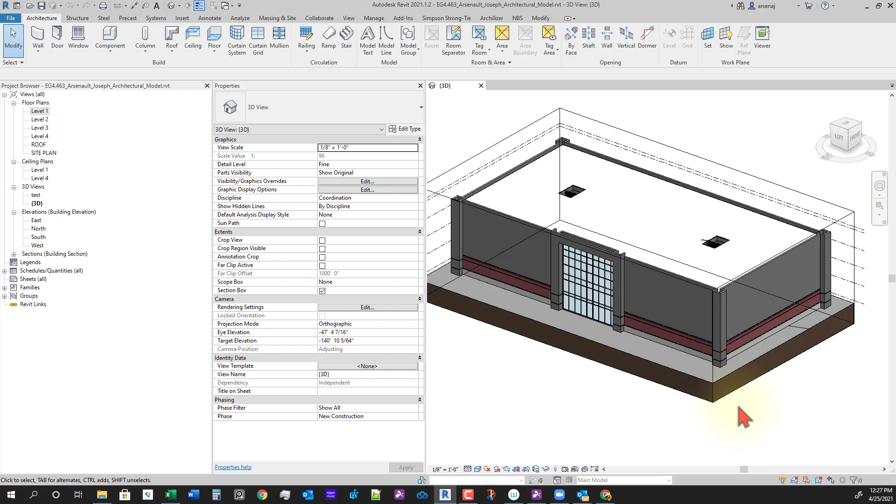In this video, we're going to move our project base point and rotate our project so that it fits better on the sheet.

What I'm talking about is if you go to level one, double click on your project browser. You don't need to do this, but I'm going to demonstrate. I'm going to create a new sheet and load in our sheet. Again, you don't need to do this, it's just an example of why we're doing what we're doing. So we have our sheet here.

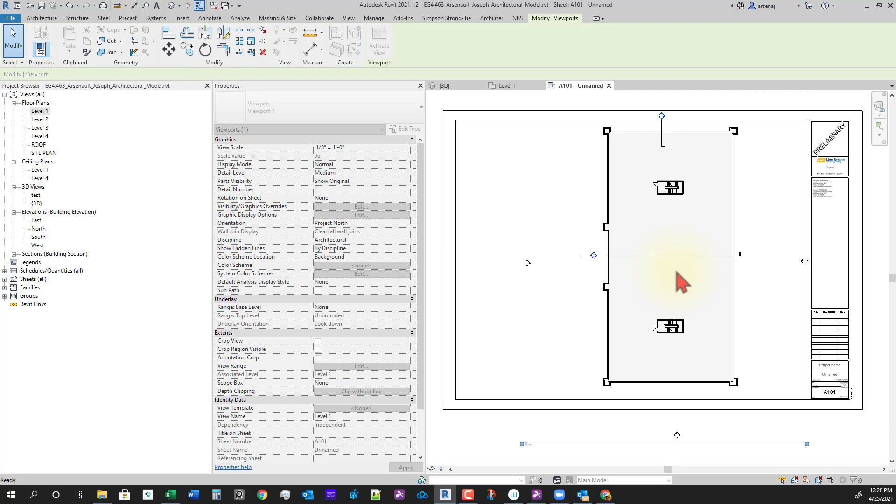If I were to pull this level one plan onto here, it fits okay on that 1/8 inch equals a foot. But as you can see, if we were to make the scale any bigger, like if we wanted our plans to be a 1/4 inch equals a foot,

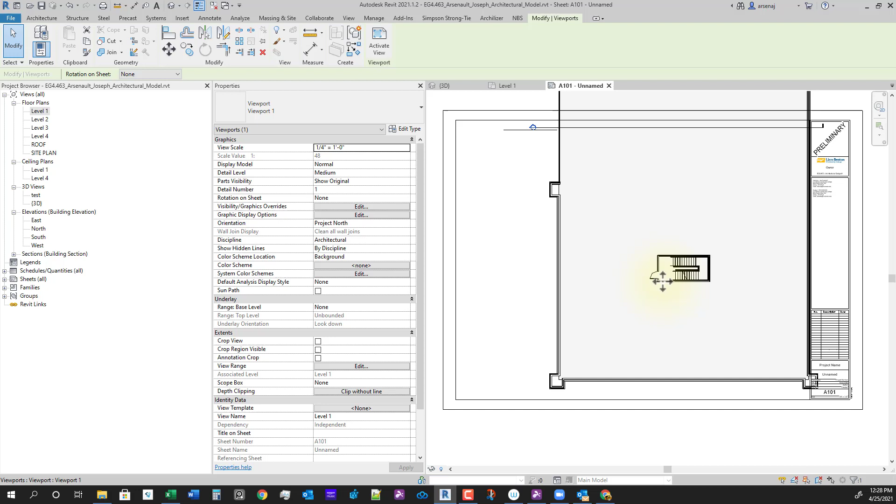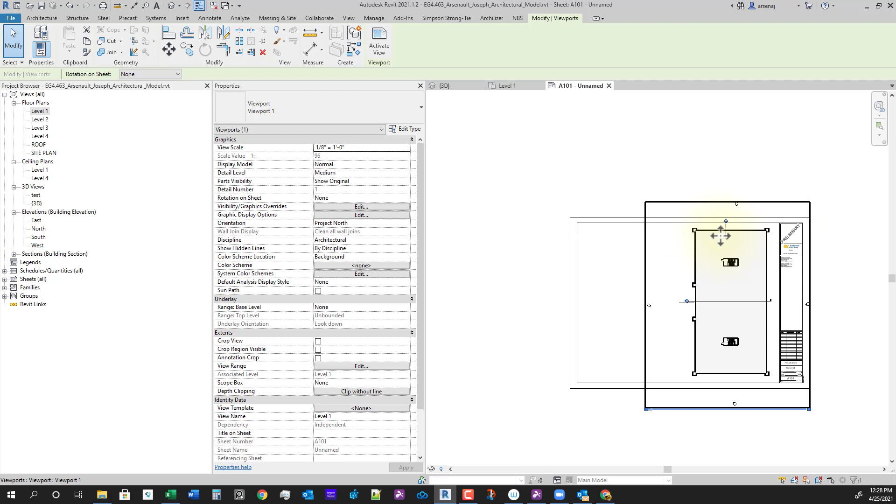it'll be off the sheet. And it would be too if it was rotated. But in some cases, it is better to rotate it so that it would fit better on the sheet. So what we're going to do is rotate our project so that in the future, if you have a project that's going to be too big - and see here, we wouldn't have a ton of room to add dimensions or anything else - what we're going to do is I'm going to just delete this and delete this sheet.

Again, you don't need to have created the sheet unless you wanted to see for yourself. What we're going to do is go up to manage. So this you can do.

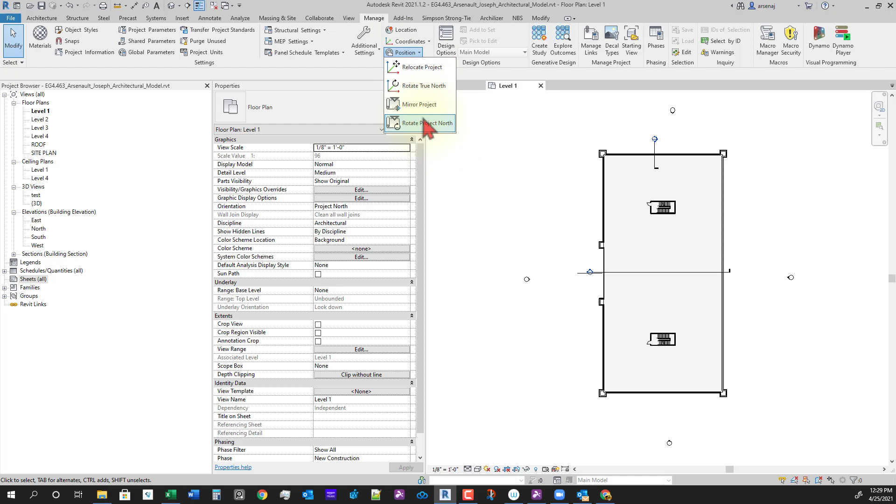And we're going to change the position. We're going to go to our manage tab, then project location, then position. We're going to relocate... sorry, let's see here. We're not going to relocate true north, we're going to relocate project north.

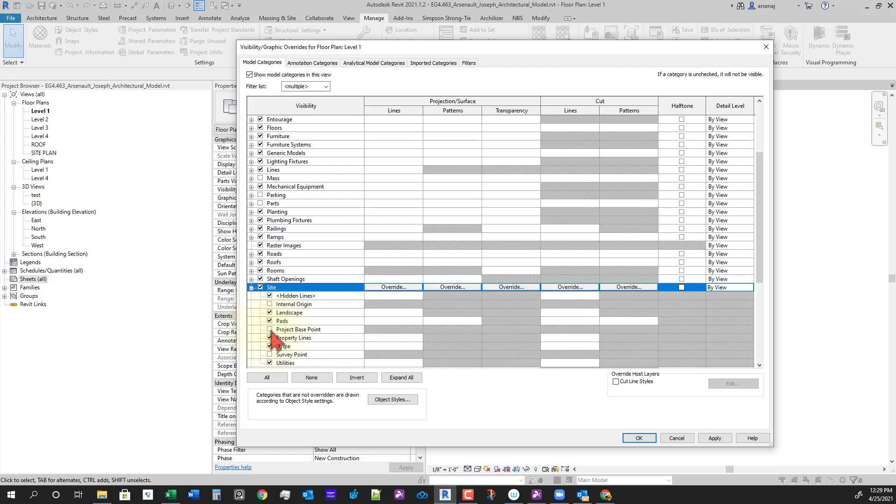Before we do that, let's go to our visibility graphics. On the view tab, or the project properties, we will go down and turn on our site. Go to project base point and survey point and turn those on.

So we can see our project base point. If you select the project base point, it'll show you the true north and where we've set our project base point. If you scroll out, you can see where we've selected our site. We can select the survey point and see where that is located.

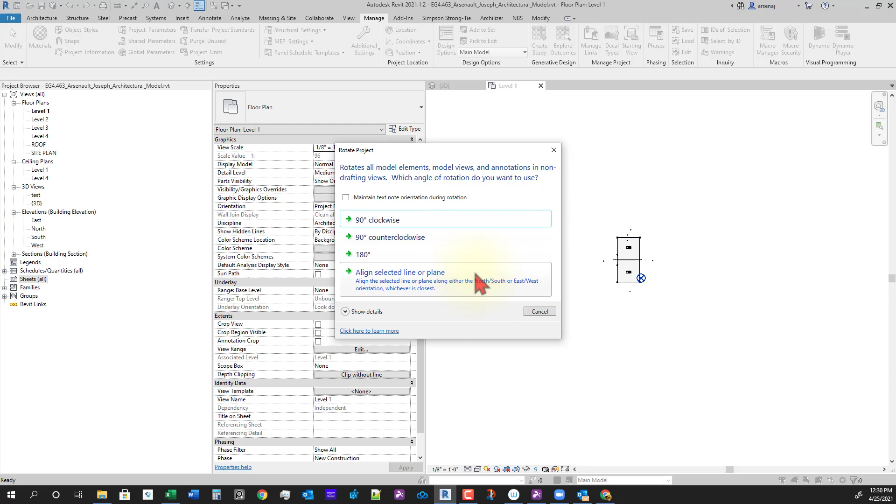So what we'll do is go back to manage, go to position and rotate project north. It'll bring up this window and say rotate all model elements, model views, and annotations in non-drafting views. Before we do this, let's open our 3D view side by side.

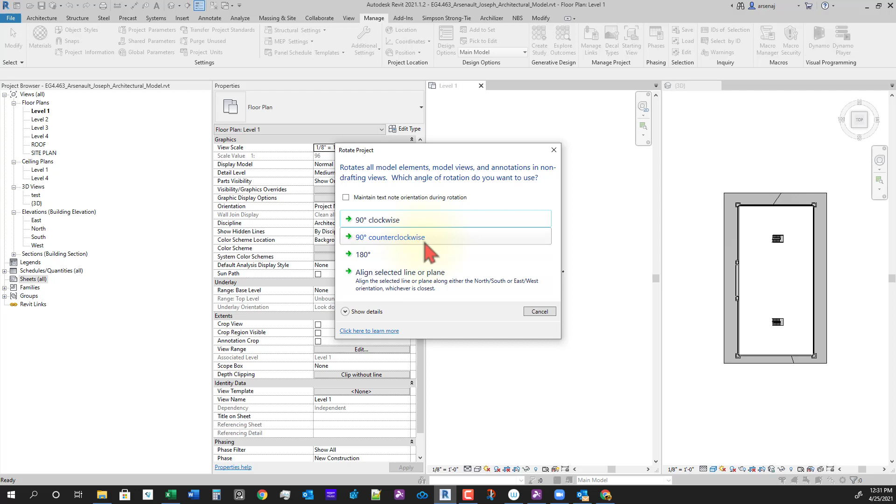You can go to view, tile views, and let's just hit the top view of our 3D view, so we can see what it's actually doing here. Then if we go back to manage, go to position, rotate project north, and let's do counterclockwise 90 degrees, which will put our west elevation where our south elevation is now. So we can go counterclockwise 90 degrees, let it grind.

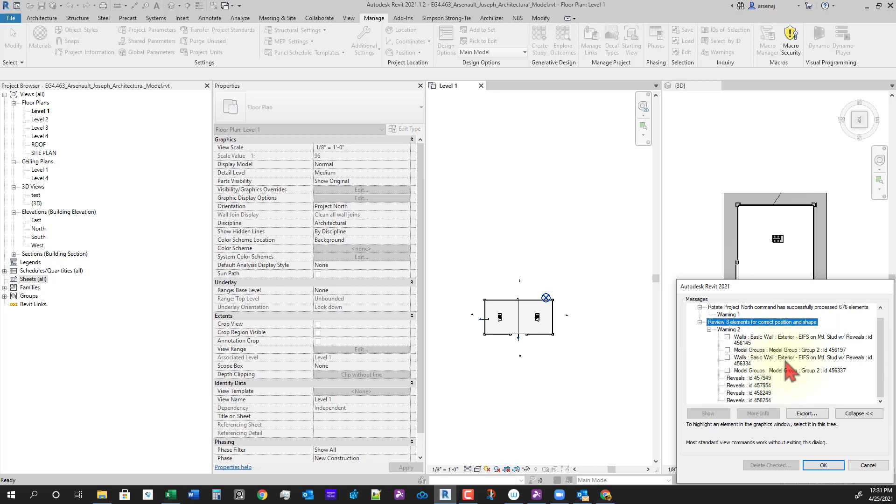Here it says the rotate project north command has successfully processed 676 elements. And here it's just showing some other error - these elements, they corrected the position for these things. You don't have to open this, but this is showing you what it's actually doing.

Here you can see in our plan views, all of our plan views will now be rotated 90 degrees. So even though this was south before, this is actually the west view because our project north has been rotated. And you can see what happened up here with our view cube.

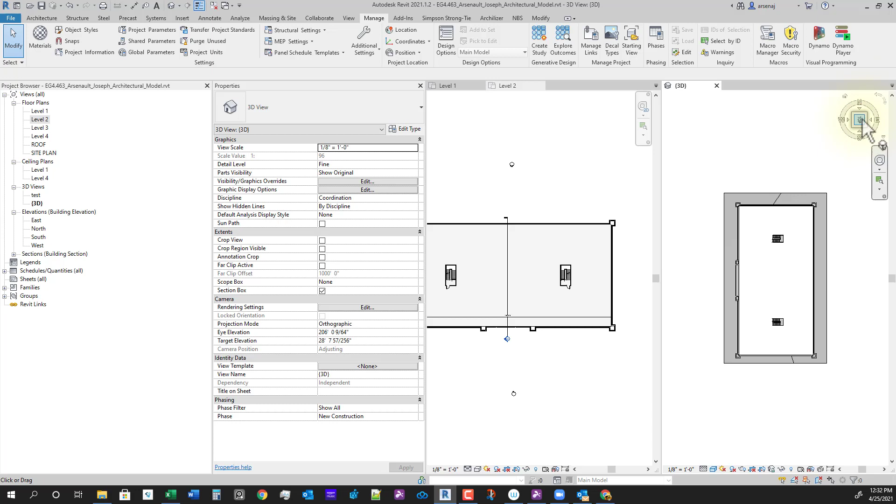The north is still showing this, but you can see how the top is now switched, so that if we were to rotate up here using the view cube arrows, now north is to the left and west is where the south was, and this is our top view, so you can see that we've now rotated our building.

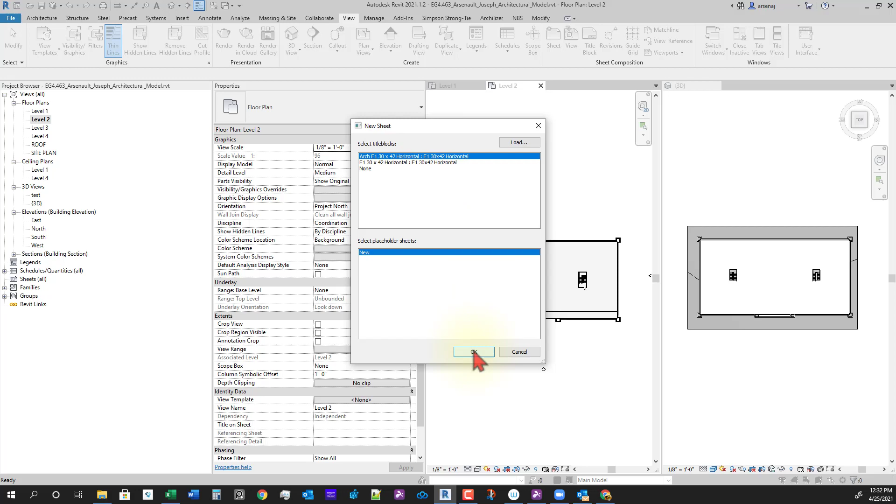So if I were to go back here to view, sheet, and create another sheet, and drag that view onto the sheet, you can see that it's rotated it.

So now in all of our views, it will be rotated 90 degrees, so it'll be easier to place it on the building. The next thing we're going to do is delete that sheet. You don't need to create that.

The next thing I'm going to do is grab the project base point and move it. We've moved it before. Now we can see the angle to true north is actually 90 degrees, and you could actually change that in here, but...

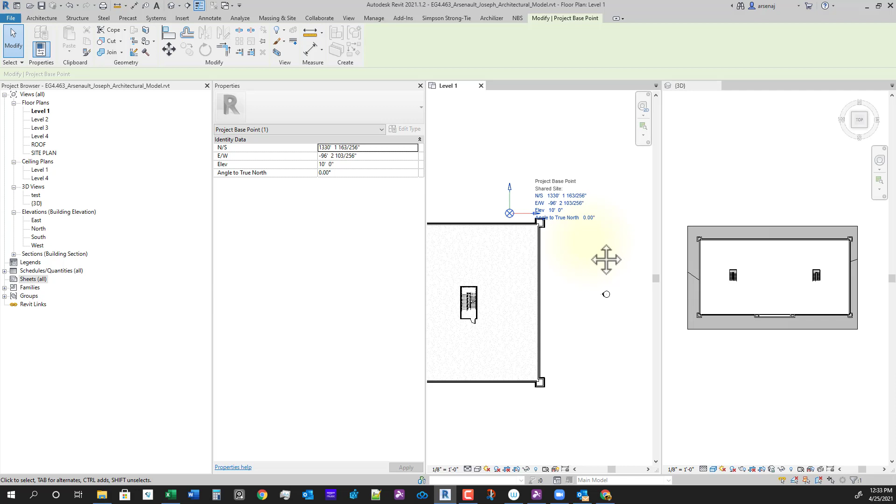Now our building is different, so it's kind of reset where north is on our project, but we don't want to do that. So I'm going to undo that, just showing you here that the project base point is set to be 90 degrees from true north.

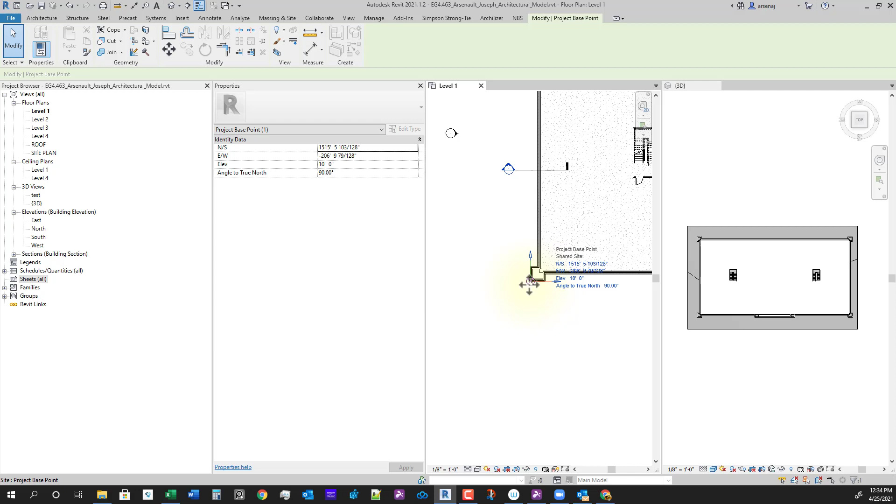And if you just click and hold and drag, we can drag this project base point over here, and you can see it's changing this north-south, east-west coordinates. What I'm going to do is move it pretty close to this corner over here.

Actually, I'm going to put it right here on that corner. But what I want to do is make this kind of a round number. So let's make our project base point north-south coordinate direction an even 1,515 feet even. You can see it moved it.

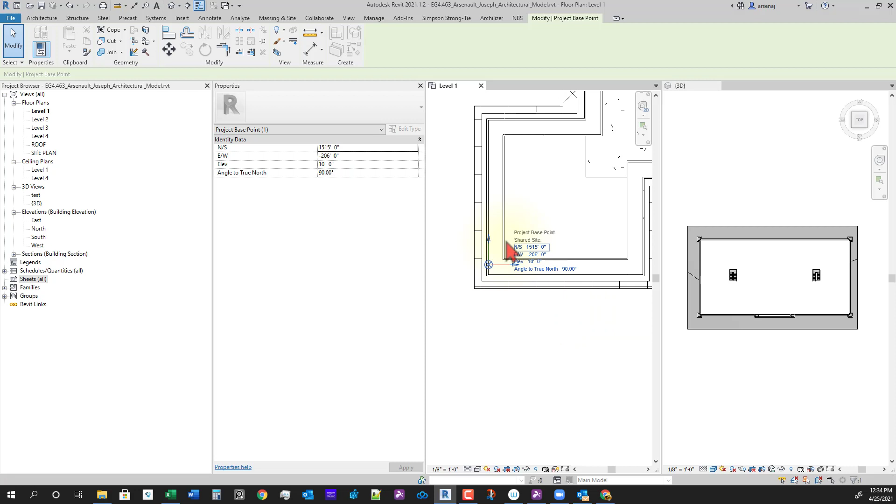And if we were to select this again, it's negative 206. Let's just make that negative, or 206 foot 9 and whatever change. Let's just delete the end and make that negative 206. So that is where I want to set our project base point coordinate location.

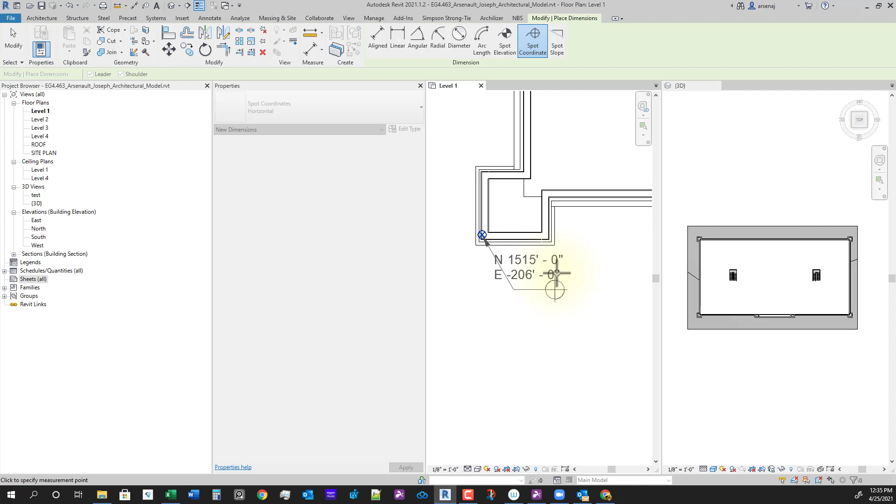So what this will do is, if we go up to annotate and we were to do a spot coordinate, it'll show us where that is located. And then what all the other spot coordinates will be in reference to that project base point.

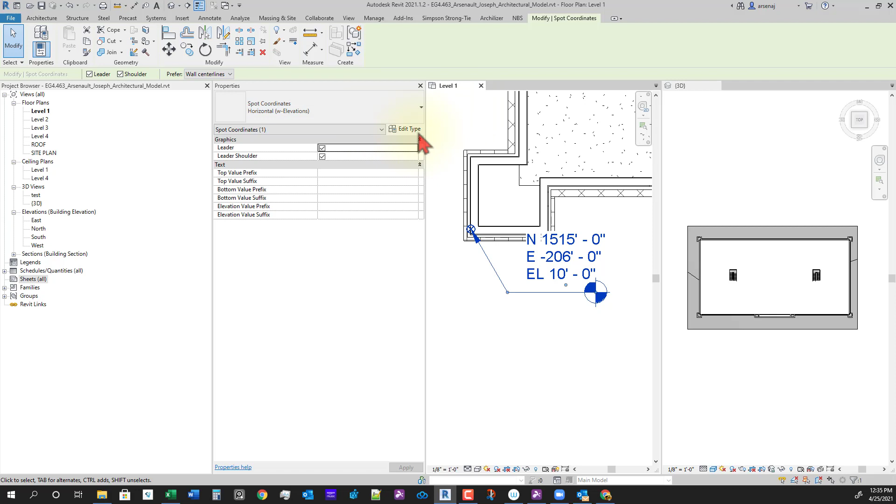So what we'll want to do is, I'm actually going to do this horizontal with elevations. So I went over to the properties and changed that to horizontal elevations. What I want to do is edit this instead of it using, so right now it's using the survey point for this dimension. It's showing us the project base point in reference to where the survey point is.

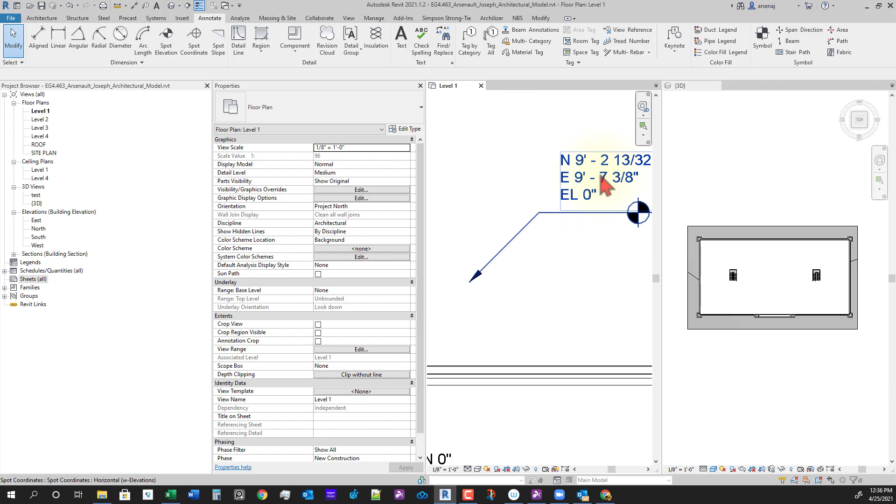So if we go to edit type when that's selected and change from survey point to project base point, and hit OK, now it should say that everything is 0. So if we go back to annotate and do a spot coordinate, let's change that to horizontal with elevations, and we can see it's going to actually give us coordinates. So at this point, from this location is 9 feet and change, and 9 feet 7 inches and some change. So it kind of gives you a reference point.

So if you were to pull any coordinates, all the coordinates that you pull will be from this location. So I'm going to select this project base point, and now we've kind of set it to some nice round numbers, and I'm going to pin it.

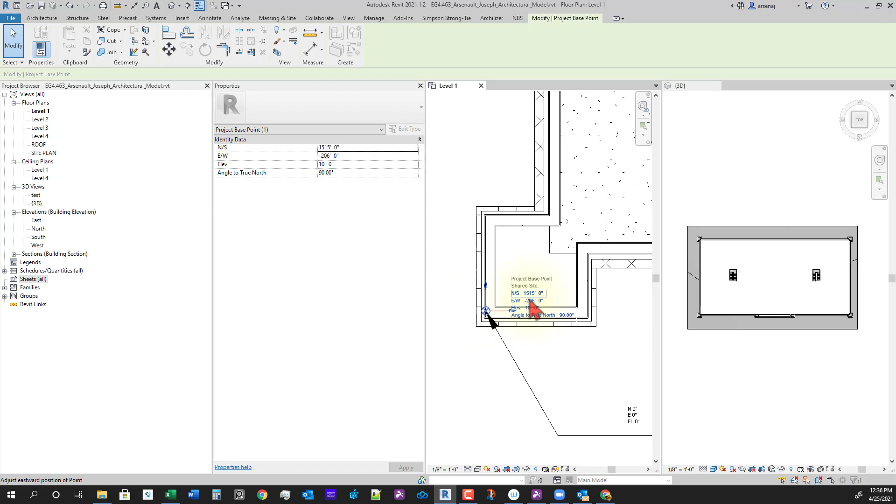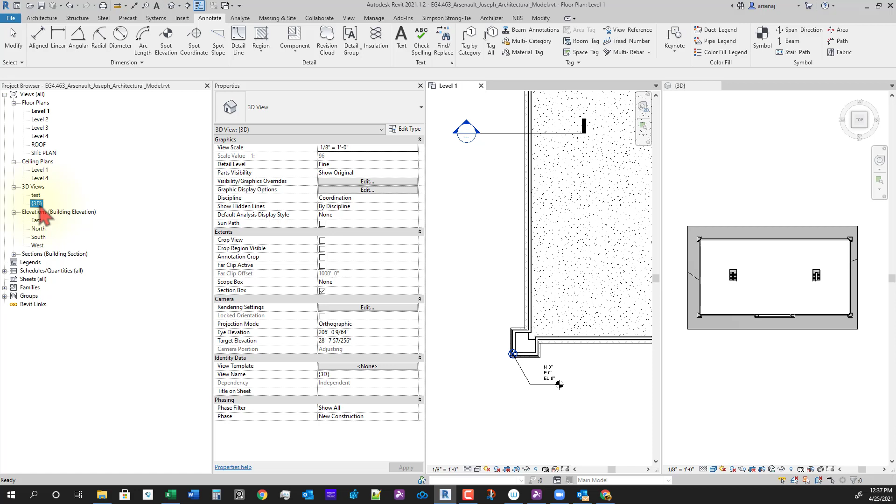And then what I'm going to do next is, I want you to delete this 3D view. The reason is because we're going to recreate a new 3D view so that everything is visible. So if you've turned off anything in this 3D view, if you've hidden the floors or whatever, when we recreate this 3D view, it'll basically recreate it with everything turned on.

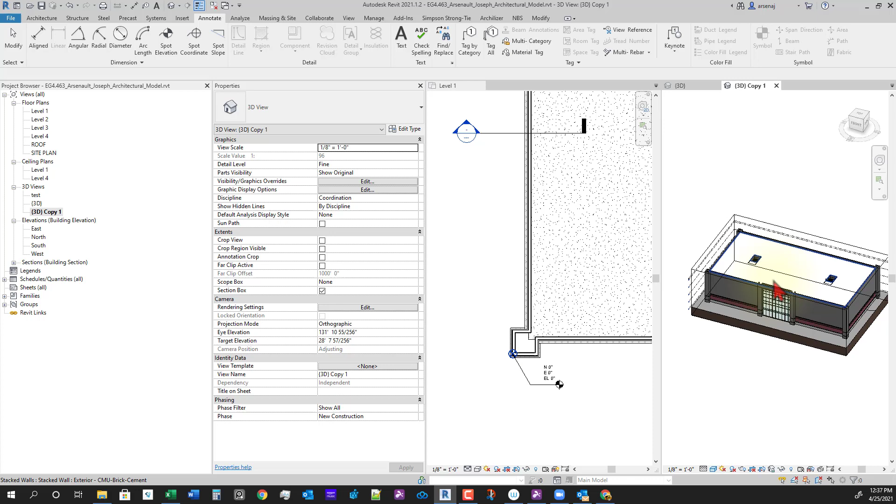If you don't want to delete it, let's say you've done some stuff, you can just right click this 3D view and duplicate, and it'll create another 3D view, and you can leave it as copy one or call it my 3D view or whatever you want to call it. If you want to save it, fine, if you don't care about saving it, then I wouldn't worry about it. And then we can go back to this default 3D view and delete it.

So the next thing we'll do is we'll come up here to the little house, or you can go to the view tab and click on this 3D view.

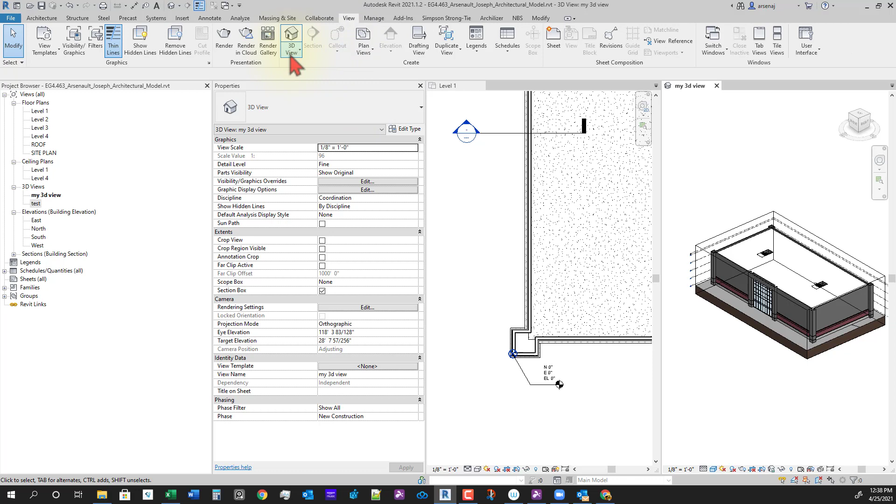It will give you a new 3D view with no section box, and everything should be turned back on. So left click over in the space and window over your entire project. If you hit the filter, you should see all these things selected, the curtain walls we've created, doors, and everything else. That's what we want, everything selected. Now we can go back to your level 1 view and hit move.

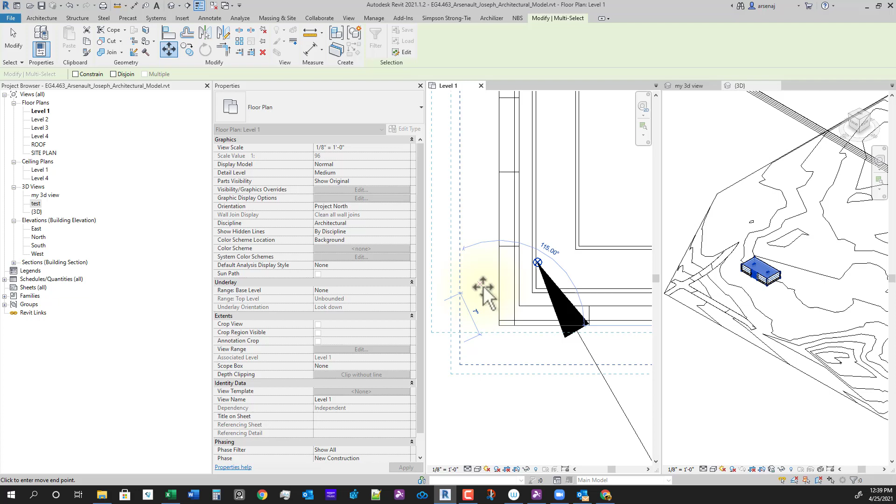I'm going to grab this corner down here, grab this outside corner, let's see if we can get it. Let's just pick this outside corner. This should be the brick, I believe it's the brick. Let's take a quick dimension just to be sure.

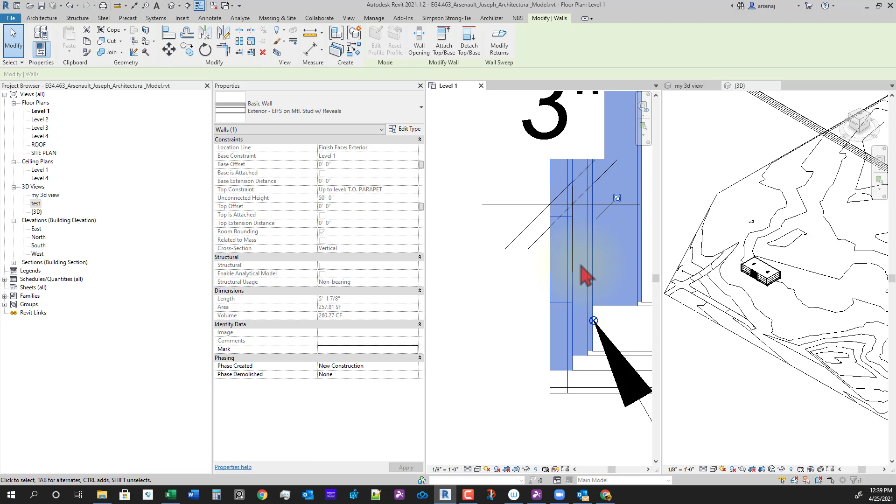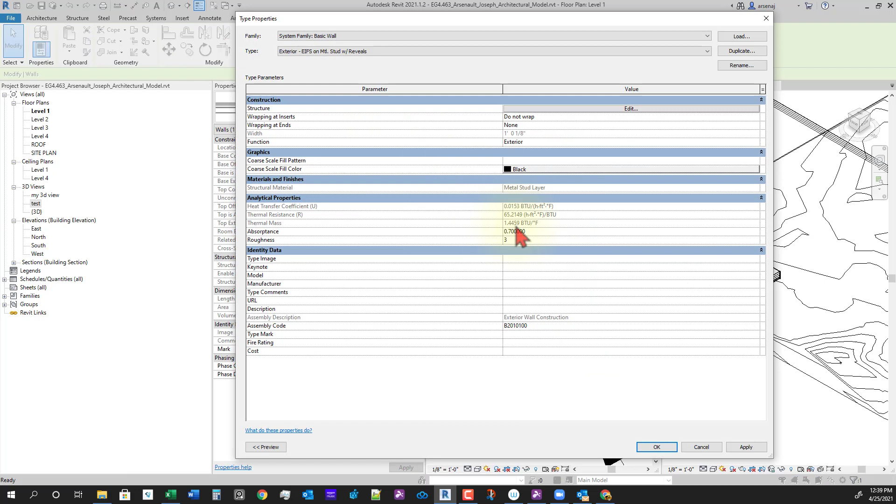Let's see, what is that? That's actually the EIFS layer. So I'm going to go to my view range. Oh yeah, because that's EIFS, I was thinking that we had brick here.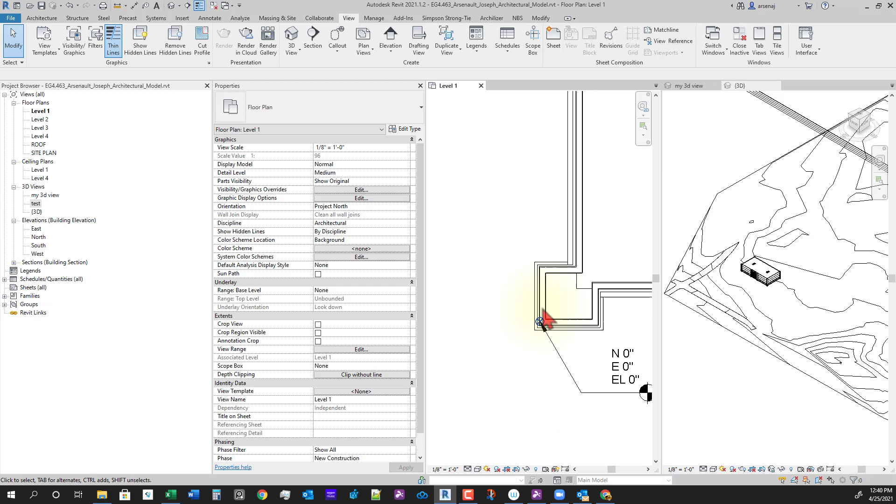So let's right click and select previous. Oh, let's just go back over to our 3D view and select the entire building, hit move. We'll select this corner of the EIFS and then move it to the center of that project base point.

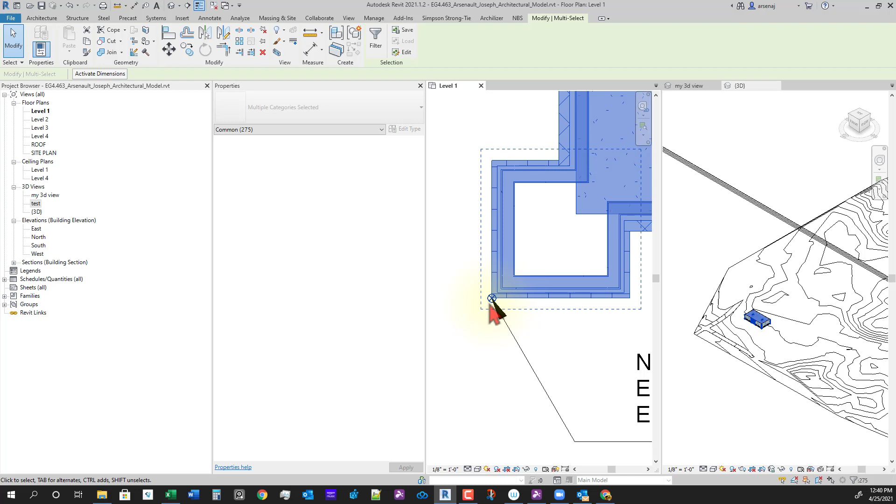So our project base point will be at the corner of this EIFS. And actually, I'm going to do something else here. Let's go up to our view tab.

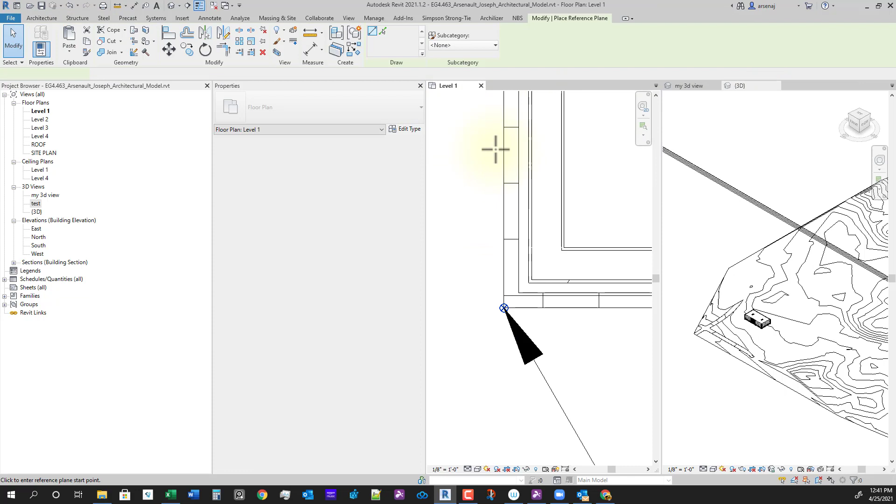No, let's go to the architecture tab and find reference planes. I believe RP is the shortcut command. So go up here to the architecture tab, let's see if it's on any other tabs. Yes, I think you want the architecture tab. I think it shows up on the structural tab too in the work plane setting, but you'll want to do architecture tab, reference plane, and let's just pick anywhere up here and draw a reference plane.

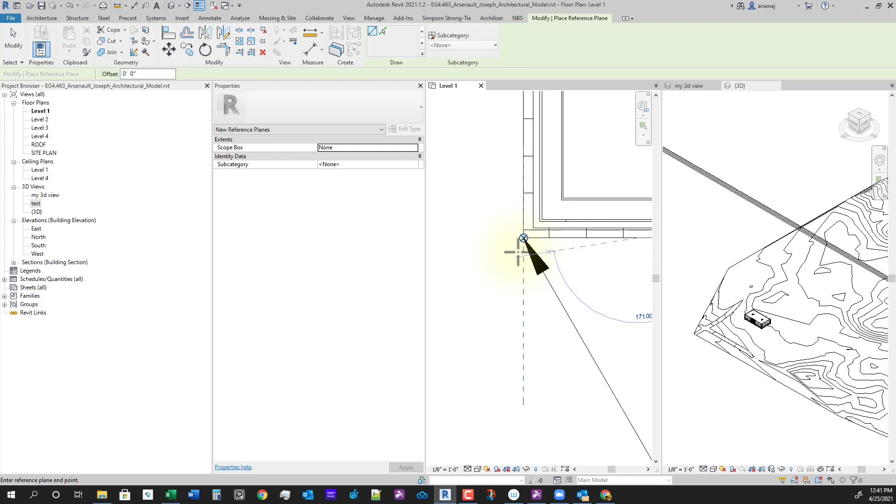You want to draw it at 90 degrees. Now we've got our reference plane going through that project base point. Let's hit reference plane again and come horizontal on the 0 or 180 degree axis. Let's lock these two reference planes so we can pin them. So we drew our reference planes kind of lined up with this.

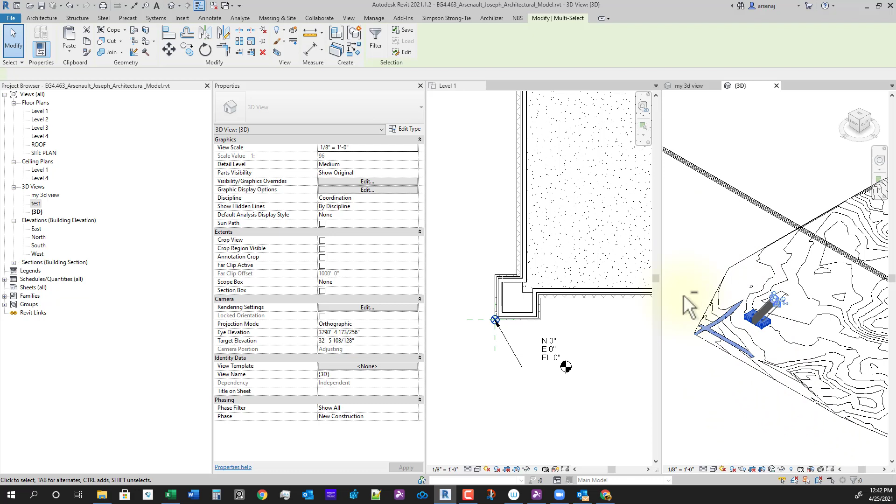And I want to select the building again, because I think what I want is to not select our road, just select the building and move. I want our origin to be at the face of stud. And I was noticing you cannot really select this corner very easily, because I want the corner of this face of stud to be on the project base point that we just moved.

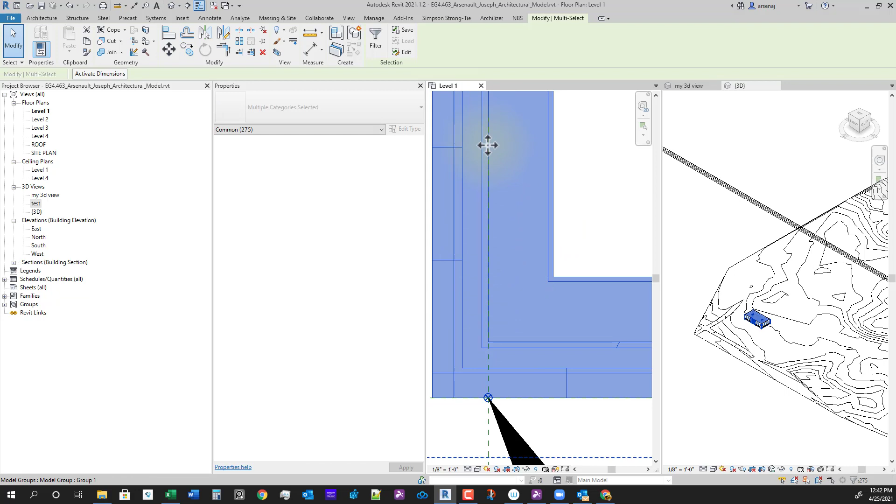So let's just select this outside face of stud, so it'll be the 6-inch stud that we're selecting and not the chipboard. As you can see zoomed in here, this line will be at the inside face of stud. We'll hit move again, MV, or come up to the modify tab and hit move. And we'll take the bottom of the side and align that, so now our project base point is going to be right here at that face of stud.

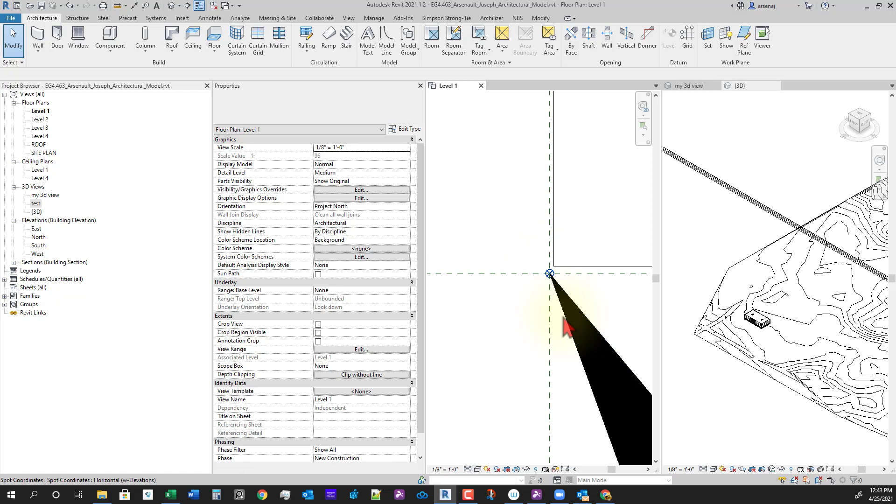So now if we were to go to view, or annotate sorry, do a spot coordinate, it will tell us in relation to this corner where everything is. So if we were to select this opposite side, it's going to say that that's 6-inch and 6-inch. It doesn't know the elevation because we're just selecting that point.

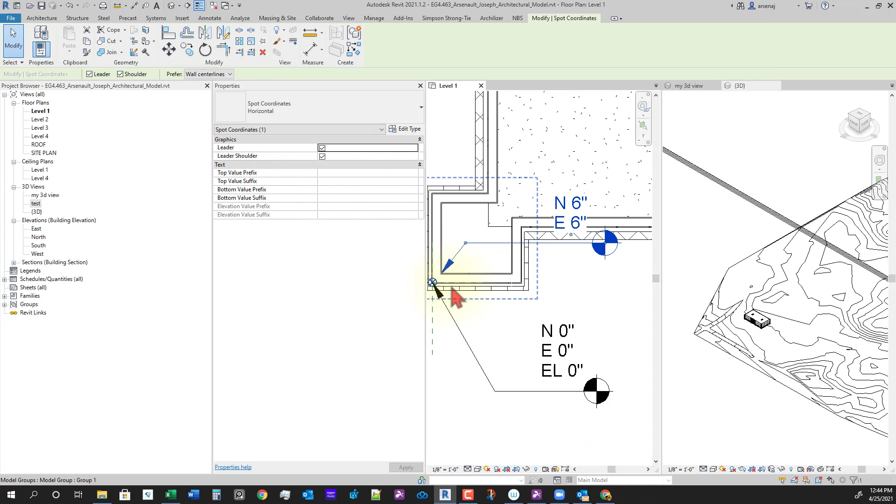So actually, if you select the second one that we placed, change that to horizontal with no elevations, edit that type, and change that to project base point as well. And now it's telling us it's 6 inches north and 6 inches east of this point here.

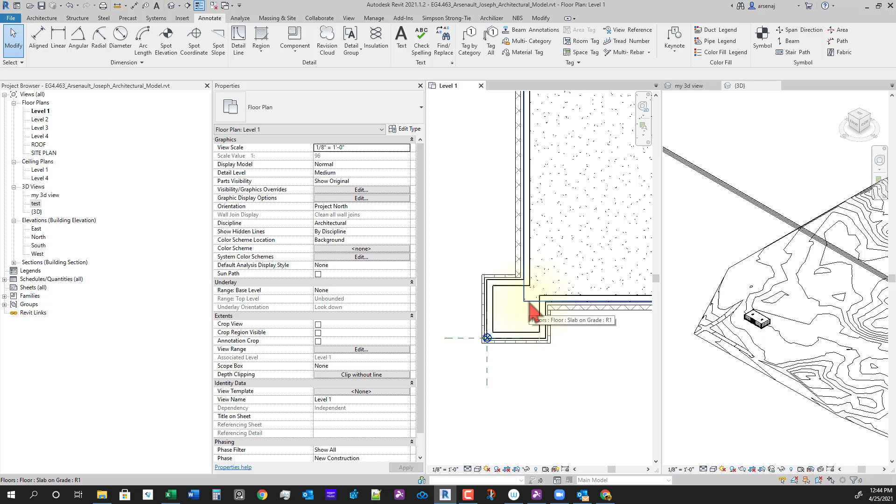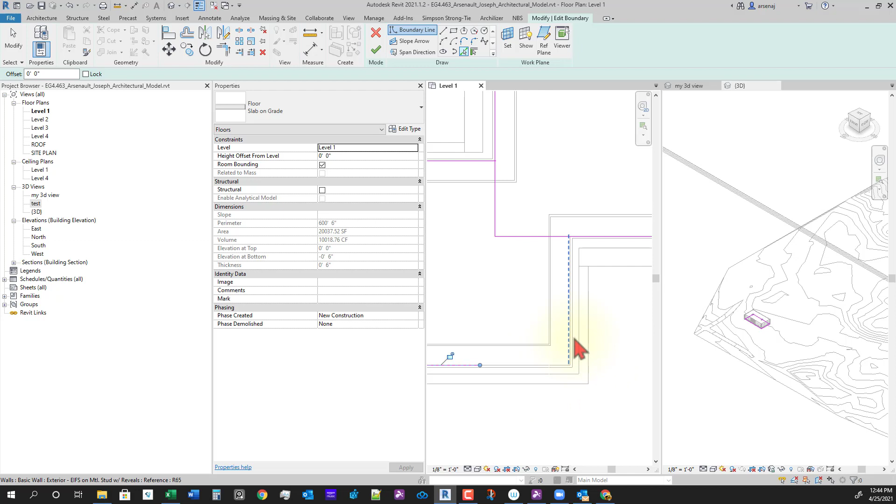So we can go ahead and delete these two. So we've done that. And while we're here, let's double click on our slab, on our level 1 slab, and just add some lines for the face of stud here. I'm going to use the pick lines so that we can pick that line here. You might have to tab to try to get that face of stud. And then we'll use our trim corner command to trim the corners here.

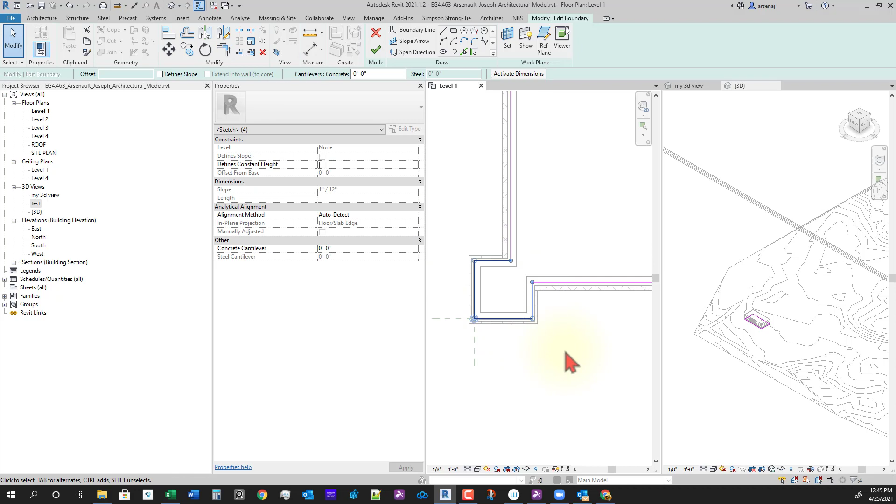So now we can select all of this corner here, similar to what we did when we copied around our little bump out, and do a mirror by drawing an axis.

Type SM to get the snap midpoint, get the midpoint of a wall, and we can actually mirror this all around all the corners.

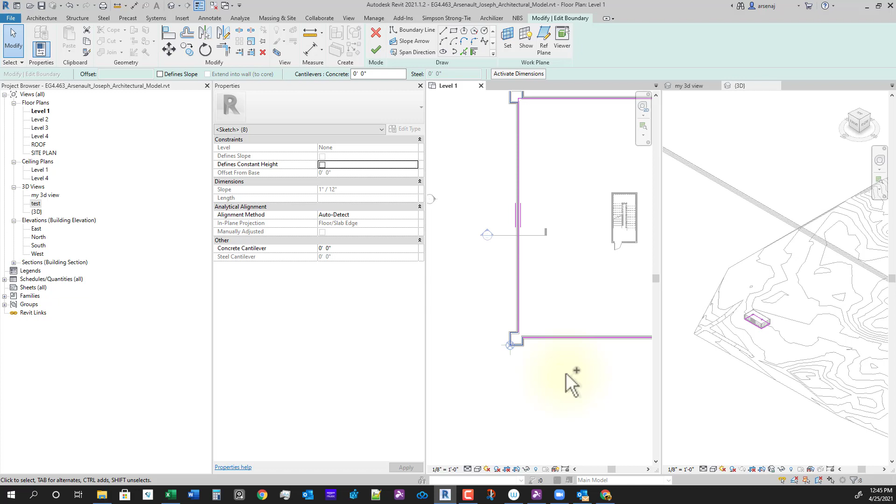So I'm going to select both of these now. Select that corner and that corner, and mirror by drawing an axis. Then do the same thing up here. Hit SM to snap midpoint.

Oops, I don't think I actually got it. So we'll mirror by drawing an axis. SM, then grabbing that midpoint, and then drawing it all around.

Now we can go hit TR, or come up here to Modify, command tab, and hit Trim Corner. Just kind of trim our slab around this little bump out that we made. Make sure we've done that on all corners.

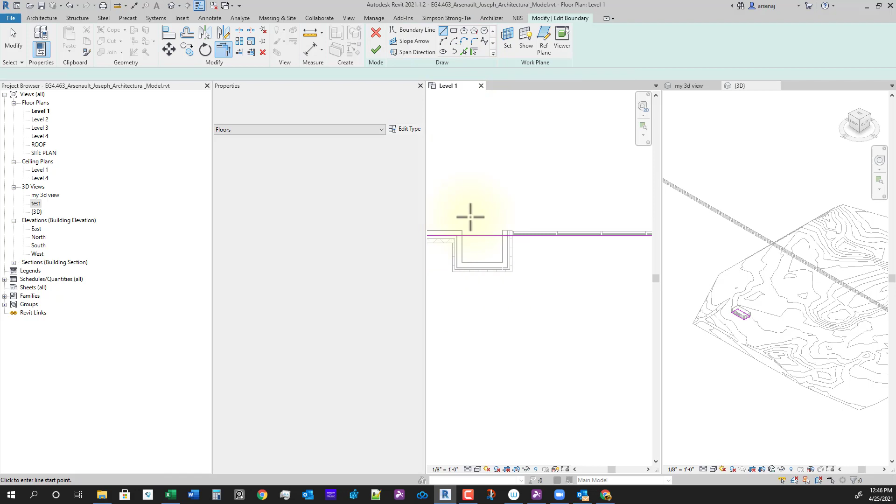And let's do it on this bump out here at the bottom. Pick line again, get that interior face of stud line.

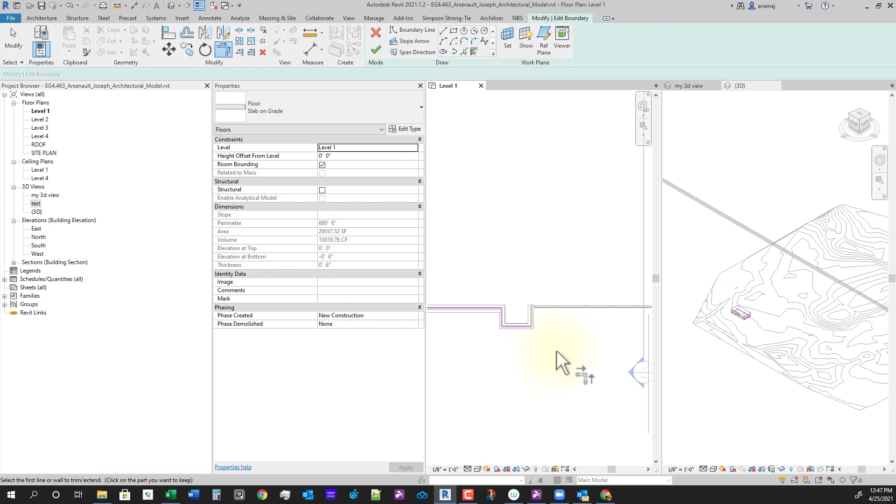And actually I'm going to stop right there for this outside face. What I'm going to do is, instead of making the slab come out for this bump out, I'm going to have it come all the way across here.

And then I think I deleted the line that continues when I trimmed, so I'm just going to add that line back and make sure it's trimmed.

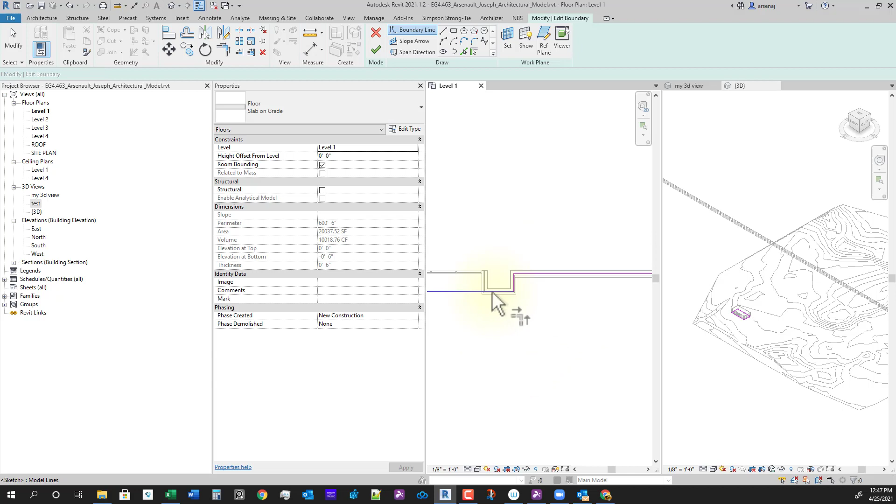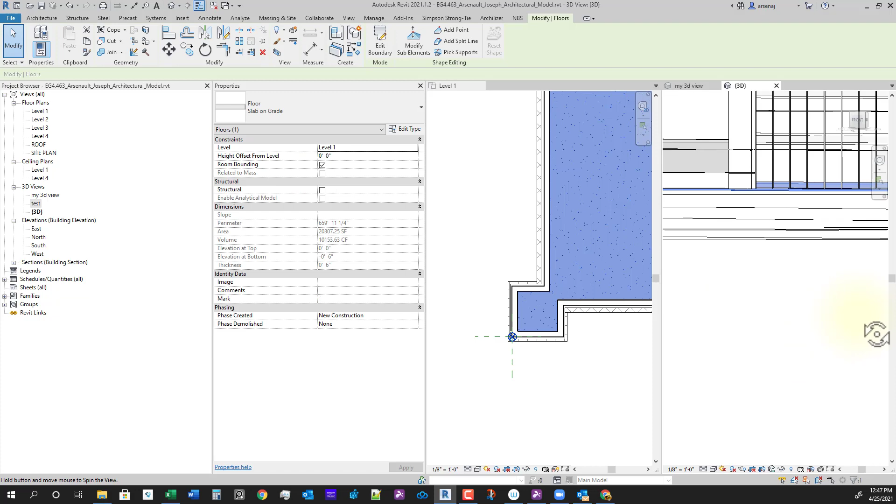And now our slab is all the way around here, so it's coming into our bump outs. Our wall is sitting on the slab, and then it's out here at all the corners.

Alrighty, so let's go ahead and save that.

So the next thing we're going to do is open up a second session of Revit. If you middle mouse click on the tab that's open at the bottom, it will open up a second session of Revit. Hopefully your computers can handle this.

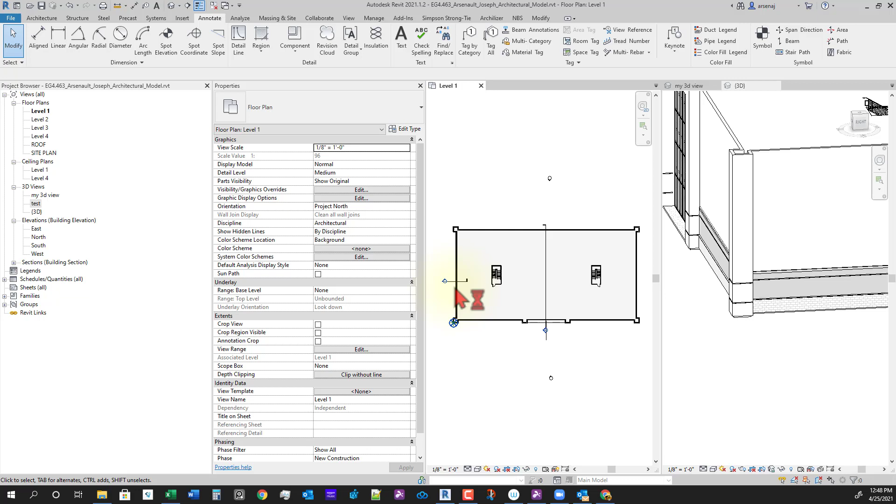If not, just close the Revit we just made. The second session of Revit I'm doing so that I can create a new file and then load our architectural Revit model. We're going to start working on our structural model now.

So I got our model loading up here, and then I'm just going to go to New. What we're going to do is create a new file, and then we're going to save over the top of that structural file we already made.

So hopefully you haven't made any changes. I don't think we've done anything to that Revit model other than create it. So you can go to Revit models, templates, and then use that base architectural template that we started with. Hit open, hit OK, and now we're going to have our new Revit project.

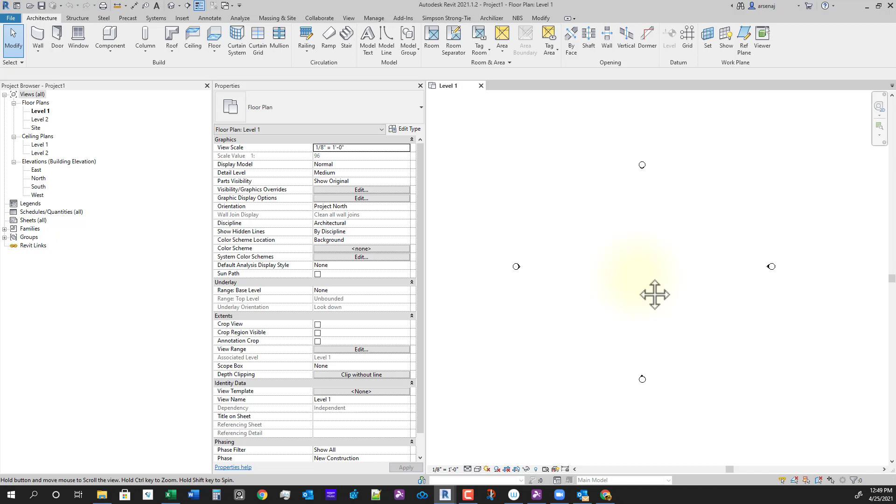The reason I'm doing this is because in the structural model, I had messed around with some things, and I just want to make sure we're starting with a new Revit structural model, so that everything is set up correctly.

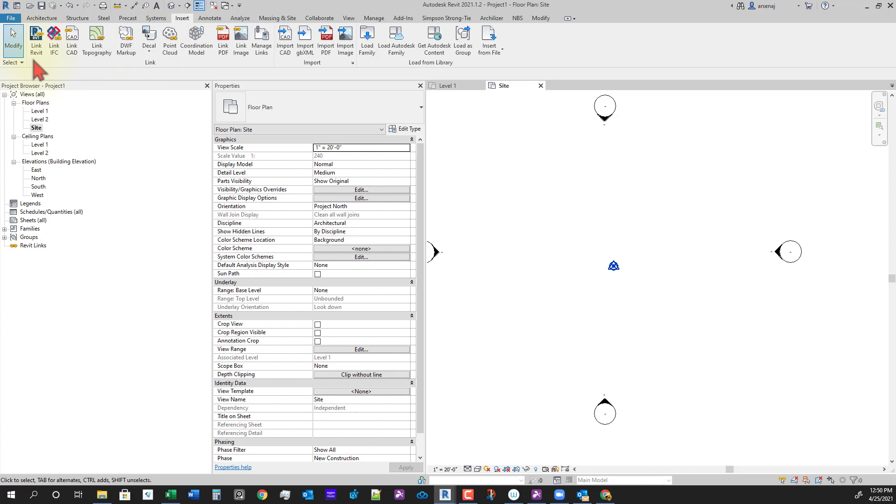So let's go to our site plan. Then up on the Insert tab, we're going to link a Revit model. Go ahead and click that, and then what you'll want to do is browse out to your Revit model location where you have your architectural model that we just rotated.

As you can see, I've got another Revit model that is kind of like my working model, so when I'm preparing for lectures, we don't need to worry about that. But I want to use the model that we were working on, and we're going to link it into our structural model. So select your Revit model.

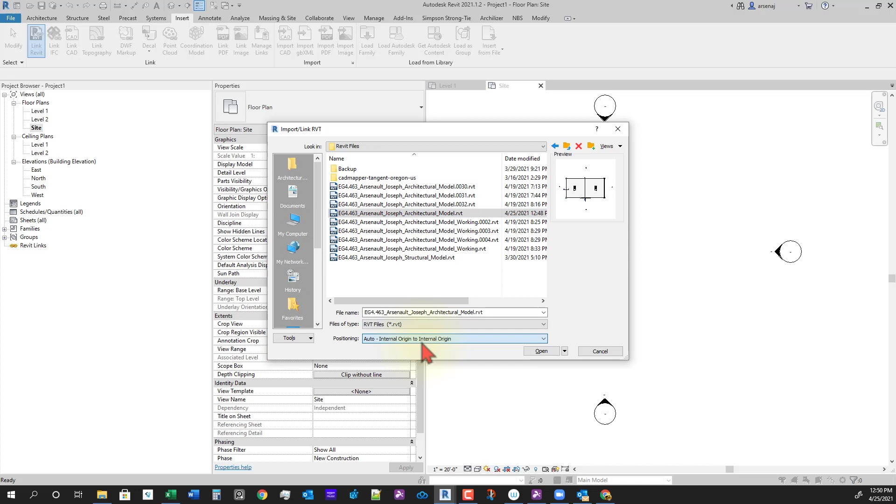Make sure it should already be set to internal origin to internal origin. That should be default, so we'll just leave that set and then hit open. And then if you zoom out, you can see the Revit model, and as you can notice, it actually imported it in rotated counterclockwise 90 degrees like we just did.

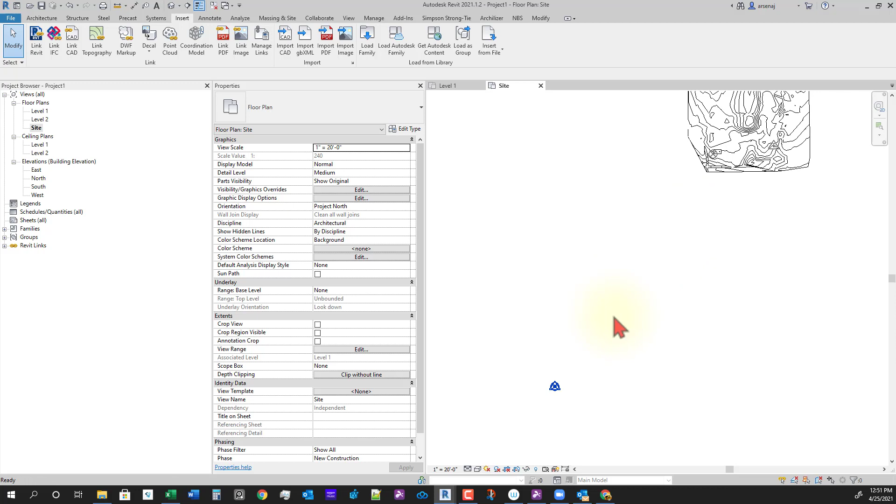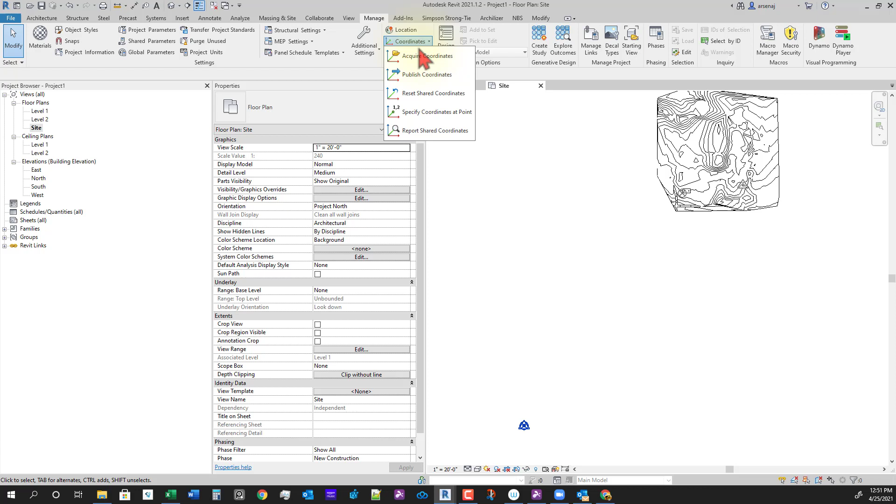So what we're going to want to do is set our structural model to use the same coordinates and site and survey point location. You can do that by going to the Manage tab and Coordinates, then Acquire Coordinates. Then pick the Revit model that you want to acquire the coordinates from, and hit Close.

As you can see, this is the project base point and the survey point from the model we just created, and now it moved our survey point to the same location that it did for our linked model.

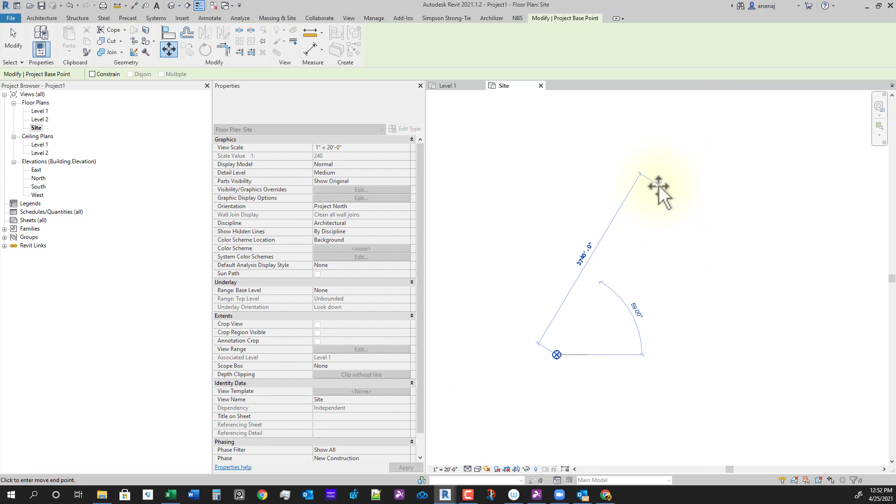Now the next thing we'll do is select our project base point. It changed the angle to true north, but we want to move this project base point to the same location that it is on our architectural model. So if you grab that and hit move, we can move it over here. You can see it's at 1515 feet and negative 206 feet from the survey point, and it's now at the same location as in our architectural model.

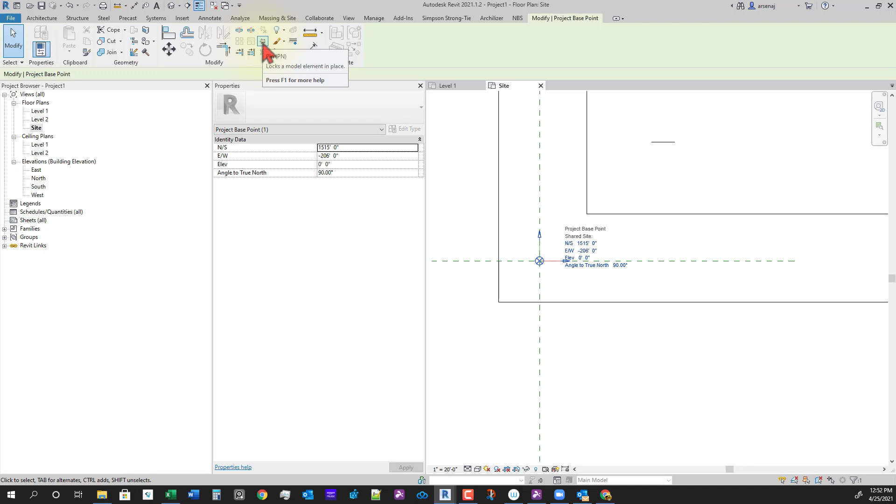Then we'll come up here and hit pin, so we can't move it. And you can see our linked model has the site topography. It has our wall, and even those reference planes we just drew.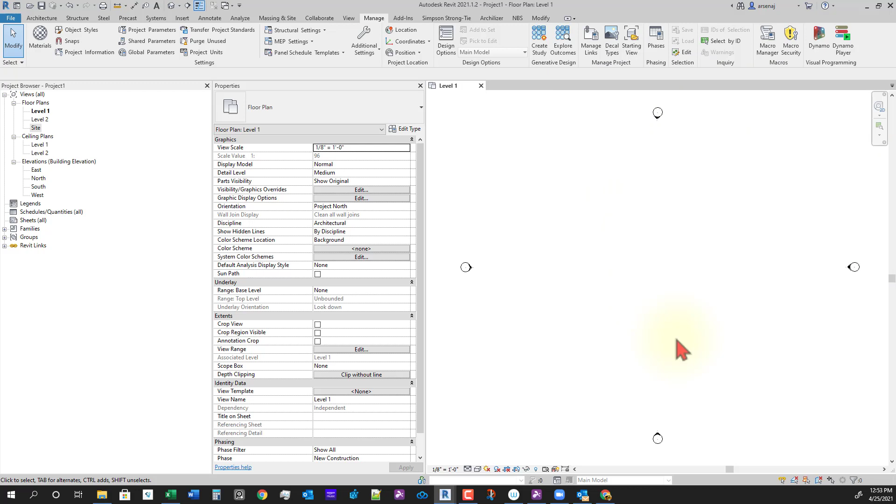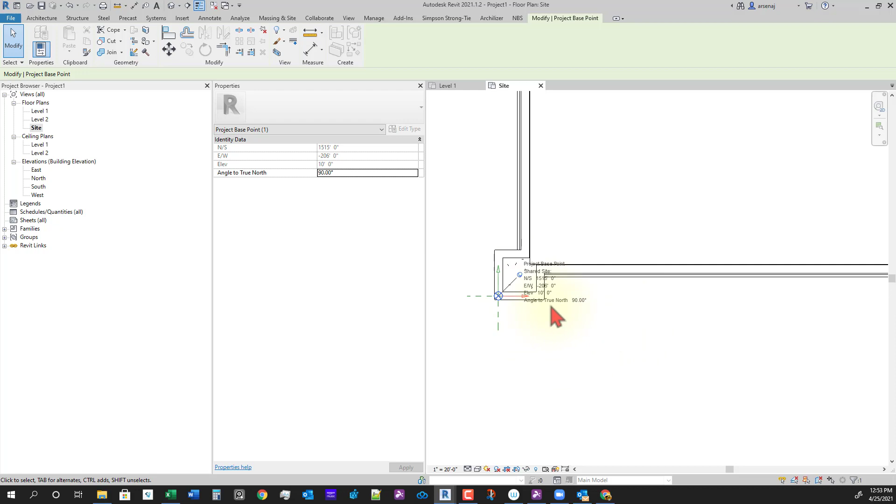The next thing we're going to do is close our site plan and go to our level 1 plan. As you can see, it's not here because our project is going to be 10 feet up. But before we do that, let's check our project base point and unpin it. One last thing I forgot is we want our project base point to be at 10 feet, similar to our architectural model, so it's at the same coordinates, and our project elevation to be 10 feet.

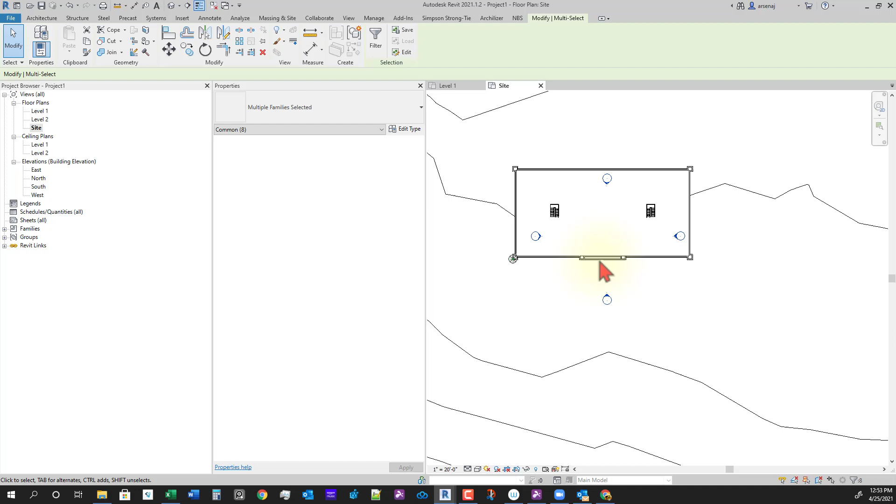So the next thing we'll want to do is come down here, grab our elevations, and move them over to our structural model here. We can grab this - you can see our base point is pinned, so we don't have to worry about moving that. And we'll move our elevations out here. Just make sure... yep, didn't move it, didn't change anything.

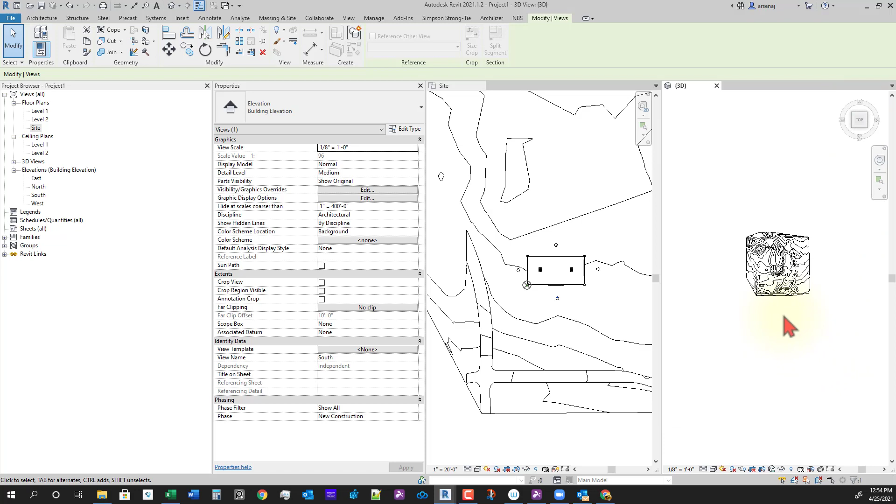Let's go to our south elevation, which technically isn't our south elevation anymore, because if we click our 3D view and toggle our views, this south elevation is actually now our west elevation. You can see here in the top view we are looking at our south elevation, but this is actually our west elevation now. So let's go to that south/west elevation.

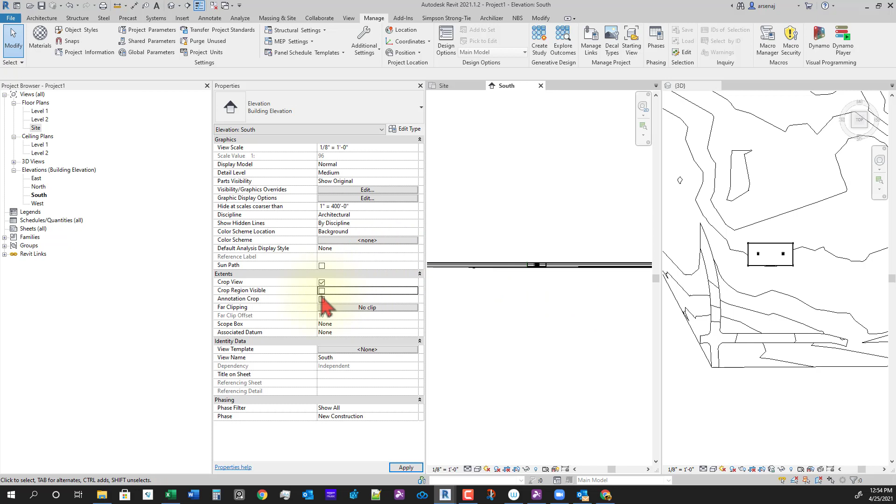And let's turn on our crop view on the properties palette - crop region visible. And let's make it so that the crop view is tight on our elevation here.

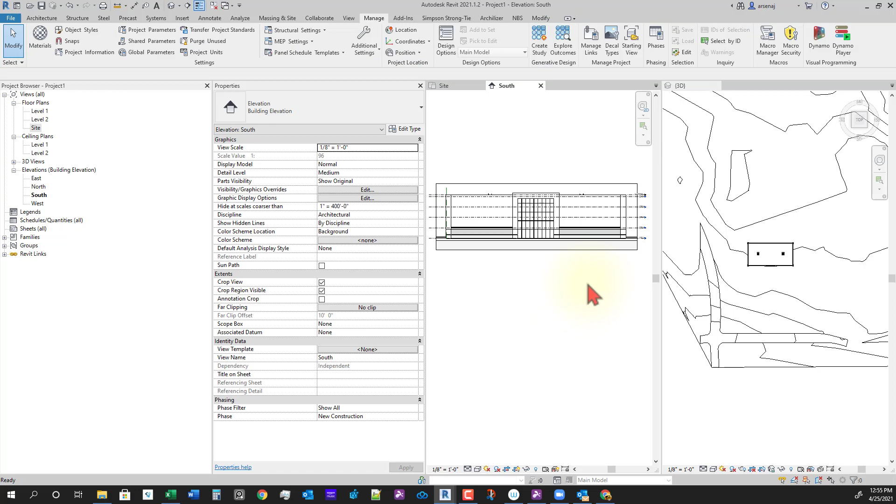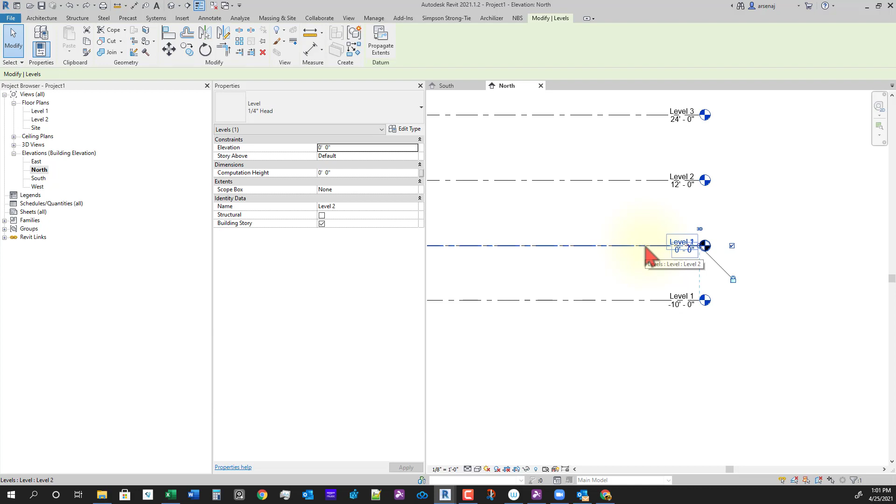Okay, so what we're going to do is go to our north elevation so we can see all of our views. Here are the views that are from our original model, from the structure model. Let's delete the level 1 view, and we'll rename this to level 0. And yes.

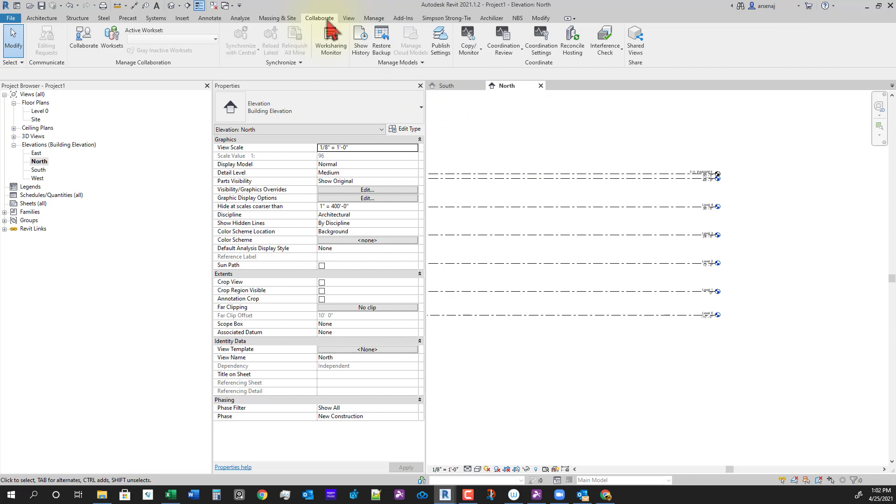Now we'll copy monitor all of these. We'll go to Manage, Collaborate - sorry, go to Copy Monitor, select the link, select this Revit link, hit Copy, select multiple, and we're going to select all these levels, window over these levels for the architectural model. Hit Finish. Come up here to Copy Monitor on the top of the tab, and then hit Finish again.

Now what it's done is copied the levels from our architecture model, so they'll be live in our structural model. You can see here, these are the ones from the link, and now these are the ones it's copied in. I'm going to delete this level 0 because we don't have that in our architectural model.

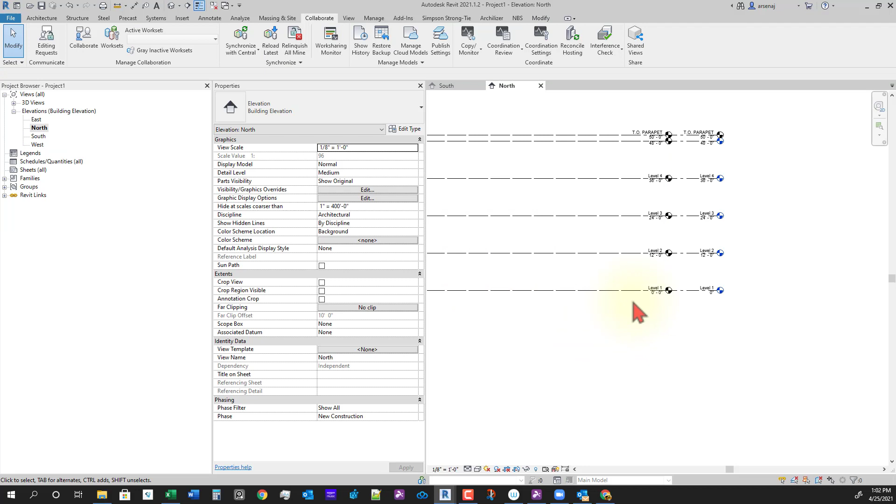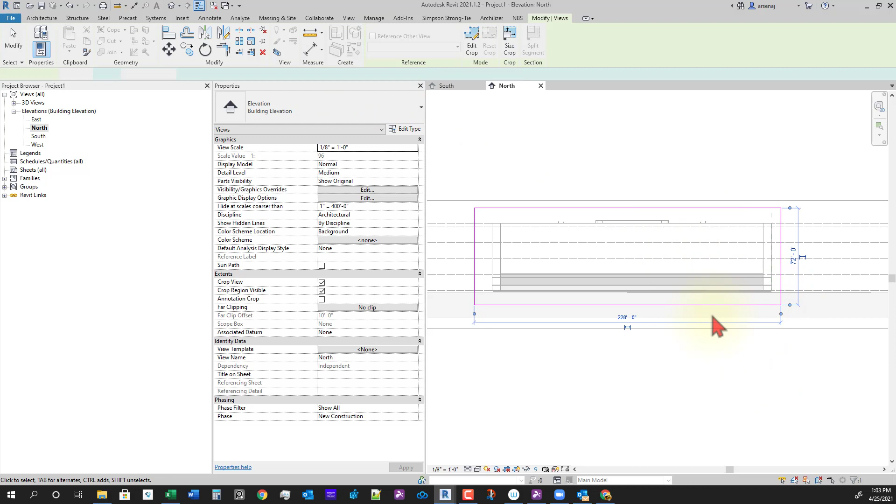So we can go to our north elevation here, turn on our crop view, crop region visible, resize it here. And then we can have all of our levels here.

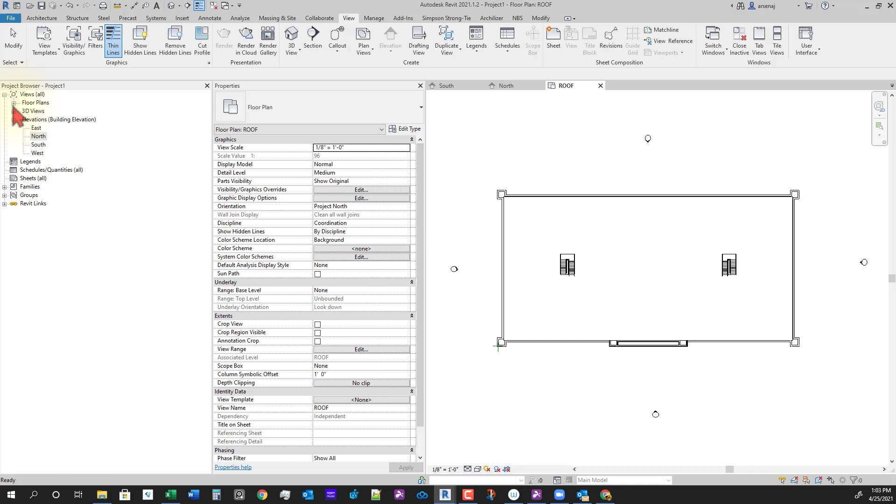So the next thing we'll do is go to our View tab, select Plan Views, and then let's create our level 1 through roof floor plans. And now we have all our floor plans. Our project base point is here, and now we've got our architectural model linked into our structural view.

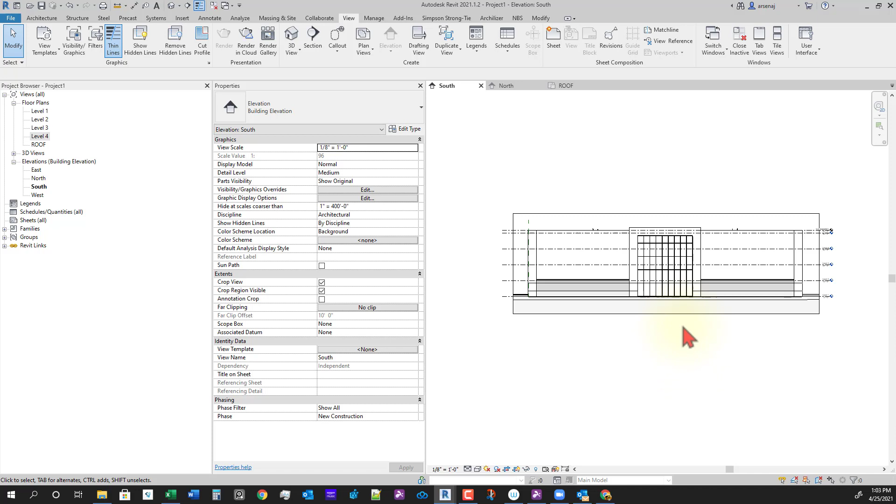Next video, we'll go over creating some content in our structural model that will then link back into our architectural model. Let me know if you have any questions, and thanks for watching.